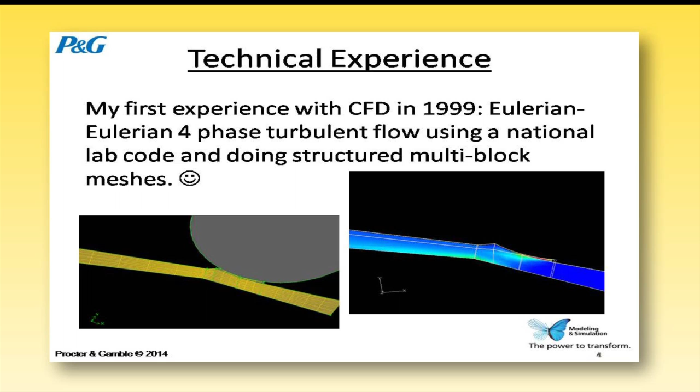But it also helped me understand, because it took me months to learn how to use this code. By the way, how many people in the room have built multi-block structured meshes? So you feel my pain.

For the rest of you who don't know what that is, be happy you never had to do that. But the point is this helped me really understand, because it took me months to be productive running these simulations. That's not okay today. We can't take months to teach somebody how to do simulations. They need to be able to do simulations in days or weeks at the absolute maximum. And so that's why this is my background. It helps me understand that.

So what's our technical purpose for simulation? It shouldn't be really different than what a lot of you guys are doing other places. It's about predicting and designing out failure modes. And those can be in products, packages, supply chains, manufacturing processes. That can be all the above.

Problem definition. I know a lot of you are in automotive, and so this idea of modeling forcing rigor is not a new thing for you guys. You've been doing this for a generation. Many other industries, this is not true. Many other industries, including mine, are highly empirical as our legacy, and so people do a lot of pretty black box experimentation.

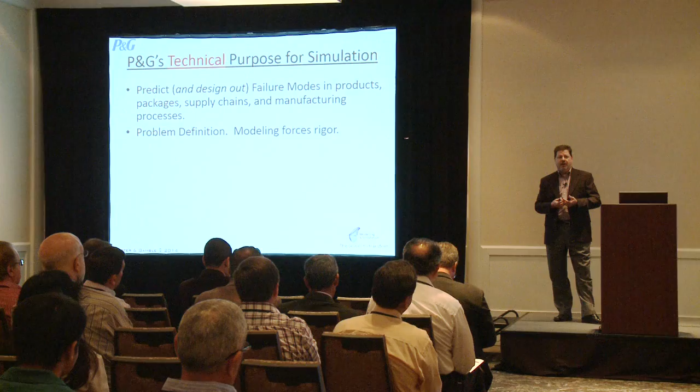So when people come to me and say, can you model something, I'll say sure, I can model that. But I have no idea if I can answer your question or not, because I don't know what your question is. Trying to build a simulation forces you to say, what's the question you're trying to answer? That's one of the things we're still in the midst of, and we're not unique at Procter Gamble in that. There are many industries still coming up that curve, in a very different place than automotive and aero are.

Understand the why of experimental results. We're still in a world where experimental and simulation are highly coupled. I heard it in Anand's presentation. In the electrical world, you guys are still there as well. There's a lot of things you don't completely have a handle on. So there needs to be a smart combination of simulation and experiments.

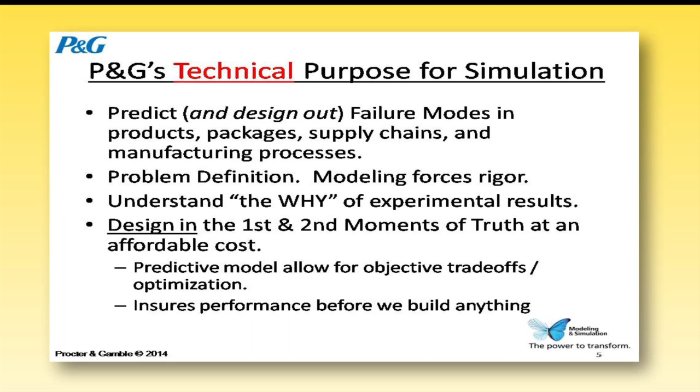And then we need to do what we call designing in the first and second moment of truth at affordable cost. For us, the first moment of truth is when the person walks to the store shelf and decides to buy the product. The second one is when they actually use it. So one of those things is it has to look good, it has to appear like something they want to purchase, and it has to work. It has to do both.

Because, and I know this is important in the automotive industry as well, how often do people buy a new car? Generally every 4 or 5 years. Our product, they repurchase it every month or two. So if you do not deliver on the second moment of truth, they don't buy your product again. And if they don't buy your product again, we're out of business. So what we call repurchase is extremely important.

And like everybody else, we want to ensure performance before we build stuff. We need to do these trade-offs to get affordable. So my point is, our industry is really no different than others. However, there's also this part about the business purpose.

We talked about innovation. Innovation is obviously extremely important because the requirements that consumers want, whether it's for cars or products for your hair or paper towels or whatever, is continually going up, and the competition is doing it. So we want to find non-obvious solutions.

We also can do a lot more trials than we can do physically, and I think everybody is aware of that. That's one of the great things about simulation. We can do cost innovation because everybody's cost conscious. Nobody wants to pay any more than they absolutely have to.

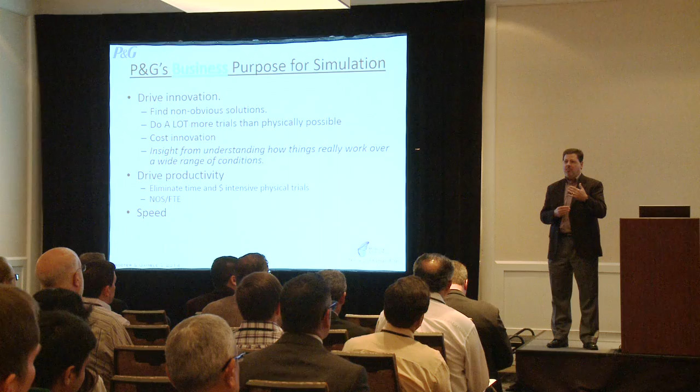Speed. How many people here think consumer products like ours get put on the shelf between October and the end of December each year? None of them do, because 30% of the product in the store is changed for the holiday season. So if you're in consumer products, you don't get to put a new product on a shelf in that time. You have to fit into the window that Walmart, Target, and Meijer want. And if you don't deliver in that time, you're not on the shelf. It's that simple. So being able to get to market when you're supposed to is critically important.

And we don't have 3 and 4 year product development cycles, we have 6-month product development cycles. So speed is critically important. First to market is extremely important. Faster decision making is extremely important, and simulation helps to do all these things. These are what the finance guys care about, quite honestly, and it's extremely important.

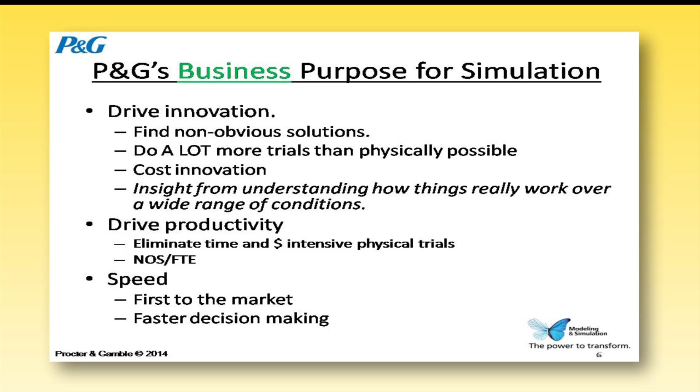I want to talk about a few failure modes. This is a failure mode that we'd rather not find out about when you do this in the parking lot, because you also would rather not have us find out when you do this in the parking lot, right? So this seems pretty simple, and actually this is a fairly old capability for us today.

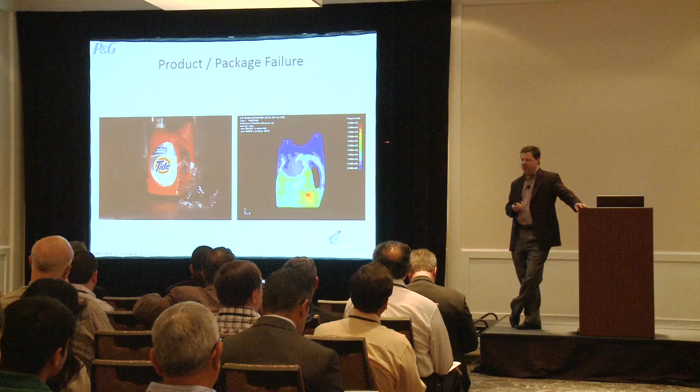But this is the design criteria for all packages that are larger than 2 liters. Whether that's our products, antifreeze, or whatever product you go to the grocery store and buy, if it's over 2 liters, this is the design criteria. There are 3 ways you can do this: you can either physically test it, you can do simulations, or you can just put a whole bunch of plastic in your bottles. But obviously that last one is not one you want to do if you don't have to, because it's quite expensive, and also from a sustainability standpoint, it's not really where you want to be. So predicting this before you ever make them is an important thing that we want to be able to do.

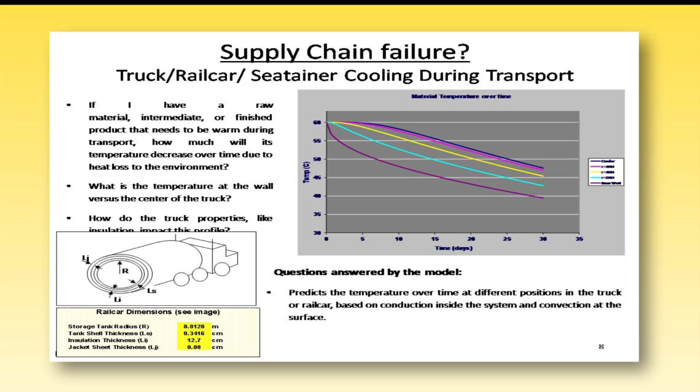We talk about supply chains. We handle a lot of raw materials. If those raw materials show up frozen, that's a problem, because melting out a truck can take about a week. And if you're planning for that raw material, and if you want a reasonable supply chain, you don't want to have huge amounts of inventory. It's pretty important, especially when you have winters like we had here in the upper Midwest this year, or if you're shipping a sea container across the ocean with a very rare raw material. This is an important thing to be able to understand.

By the way, this is also important for finished products in trucks, in cases. Some products are temperature sensitive, so you need to understand: are they going to get hot? Are they going to get cold? How long are they going to be exposed to those conditions? And when you have literally tens of thousands of trucks inbound and outbound on a monthly basis around the country, this is pretty important.

And also we have very different supply chains around the world. As you can imagine, the North America-based supply chain is pretty different than the one we have in Southeast Asia, which is pretty different than the one we have in Central and Eastern Europe, which is pretty different than the one we have in South America. And so being able to predict this, because we make the same products in all these regions, is a pretty important thing to be able to do.

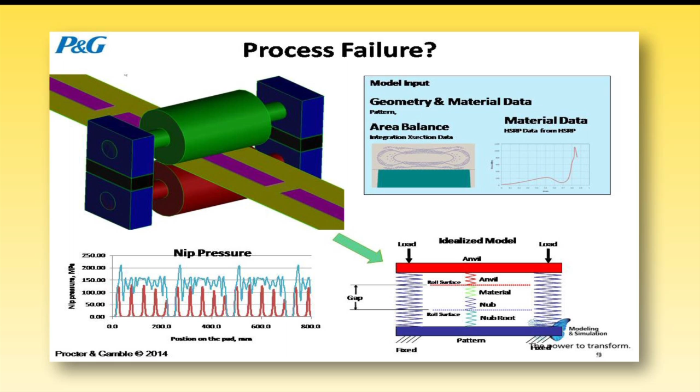And then process—this happens to be a mechanical process, but we could have had a fluid one as well. This is basically a high-speed manufacturing process for either diapers or our feminine care products. Essentially, you want to be able to put nice patterns on them, and you don't want to poke holes in them, and you want to be able to do it extremely fast. So this is an interesting dynamics problem, which looks pretty easy until you add a material in here, which I'm going to show you in a minute, that makes it pretty complicated.

And the reason I'm showing you these is to get to this point: these are not simple problems. Dropping a plastic bottle full of liquid and getting fracture criteria for plastic—that's a very, very complex problem.

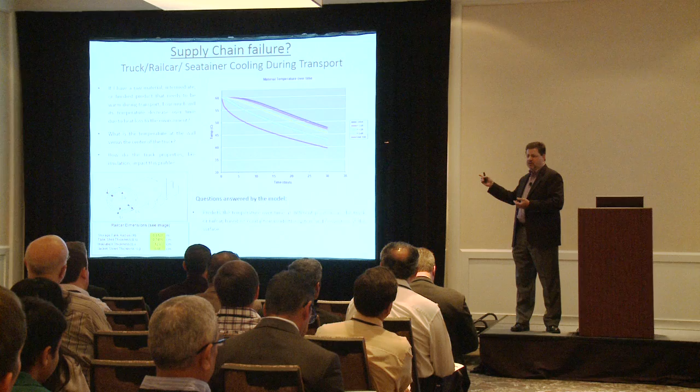Yet we don't want to have experts running it every time we want to test a bottle shape. We want to have non-experts doing that. If I go back to this one, these are questions we need to answer every day for different supply chains. We don't want to have experts do these all the time. We want to be able to have non-experts answer these questions.

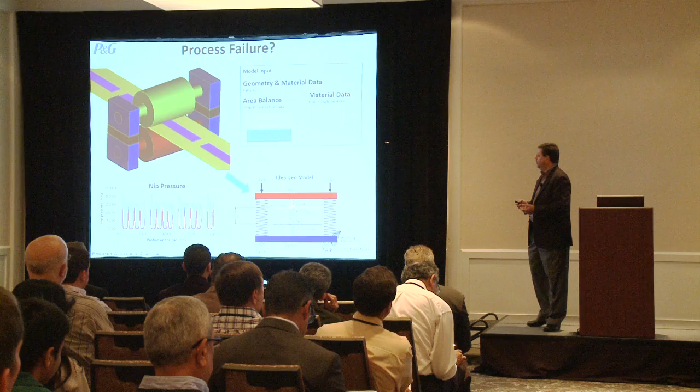Even this one is something, quite frankly, pretty routine in our product and process design world. We want non-experts to be able to do this, but the dynamics of this problem are extremely complicated. And so these are the things that we need to be able to do. Oh great, we have sound on this one.

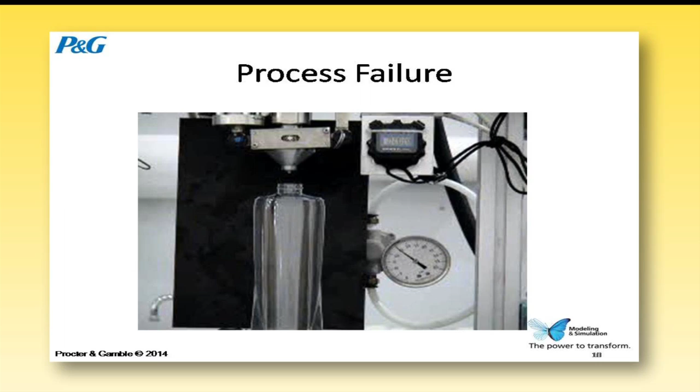This is pretty simple, right? Putting shampoo in a bottle, how hard can it be? Well, it depends on the fluid, right? And it depends on whether you actually want the product in the bottle or not. And because of the rheological complexity of this fluid, something as simple as putting a fluid like this in a bottle is actually quite complicated.

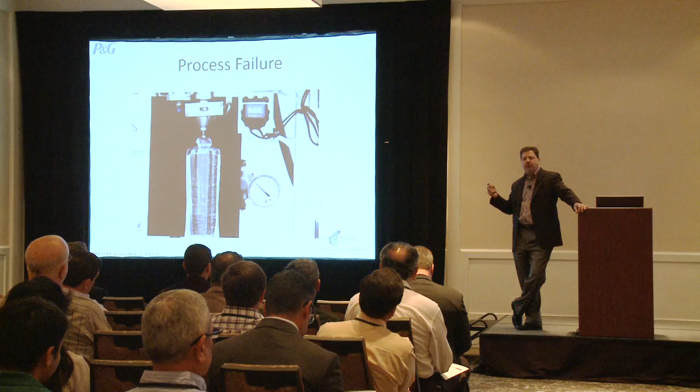And it's a very high-end tool. It's not a high-end tool because we don't know how to do fluid flow. It's a high-end tool because of the rheological properties of these materials, and the fact that they have hysteresis, rate-dependent effects, and all sorts of stuff in there. So that's what makes this a complicated problem.

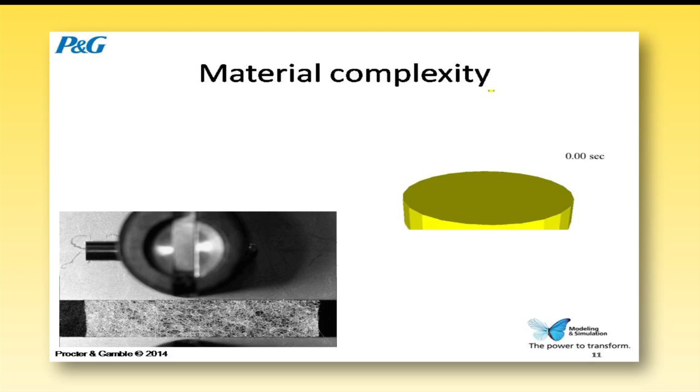And here's a couple of materials. The one on the left there, that's a non-woven. You typically find those in disposable diapers or things like this. This is actually a simulation of toothpaste.

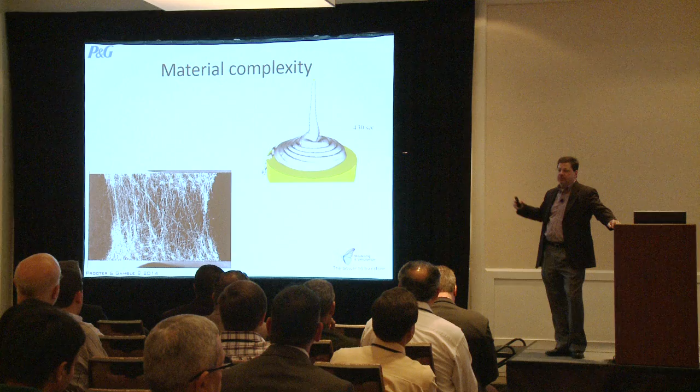And you say, well, who pours out toothpaste onto a flat thing? Well, nobody does, actually, or I hope not. But this is related to the properties of how you get it in a tube. And the same properties that lead to that coiling effect are the same things that either make it easy or difficult to get it into a tube at the rate you want, and actually have it in the tube, not all over the tube.

It also relates to how you get it out of the tube and put it on your toothbrush in the morning, so that it actually comes out and doesn't run out of the tube, or you don't have to squeeze it so hard you can't get it out. So these are some interesting material complexities.

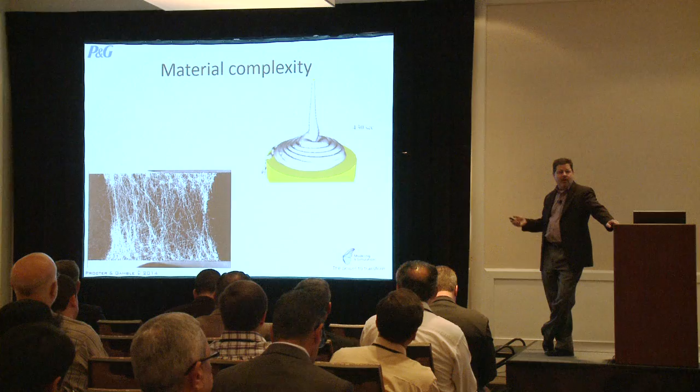Again, these drive very high-end tools. And yet these are routine questions that we want to have lots of people be able to answer on a regular basis. These are our engineering materials.

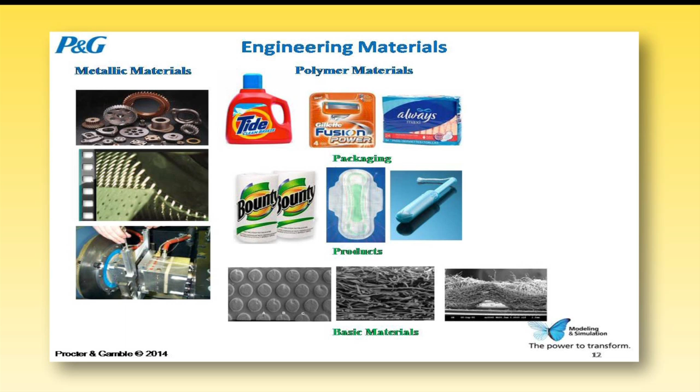We are really lucky when we get to work with metal. We used to have a joke in the one group that I led that said, can I please get to analyze a bracket? Because I actually know how to do that. The fact of the matter is most of the time we're working with polyethylene, which is a pretty highly variable product and actually has some fairly difficult properties associated with it.

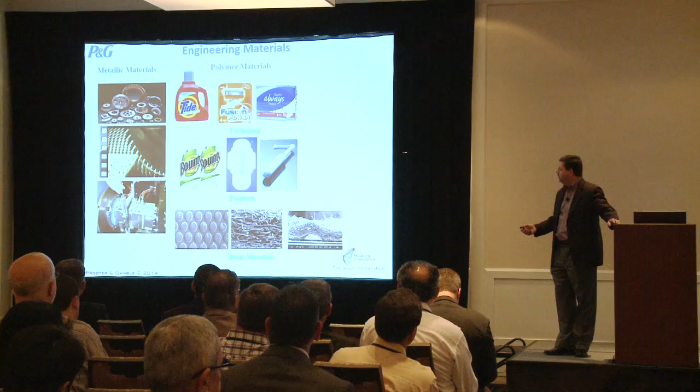Or we're working with elastomers, or we're working with fibrous materials like this. And so a lot of our starting materials are polymeric films or fibrous materials, and this can be both for their structural or for their fluid handling properties.

Structural properties of this, if you want to build a simulation, is one of the most difficult problems we've ever done. And you go to ask people how to go do that, and they're like, oh, well, just use soil mechanics models. Well, soil mechanics models don't work because soil doesn't compress 80-90% during its use and during its manufacture.

And so we actually had to develop not only test methods to actually measure those properties, but new numerical ways of describing the material behavior that's basically a combination of a lot of things that are out there, plus some very clever things that some smart people in our company figured out how to do. But this is one of the things that makes our problems very complicated.

And you have to, and just measuring this and getting it into a finite element formulation is pretty difficult. Getting it so it numerically solves is yet another problem. And then giving that to a non-expert so they can actually get an answer is yet a third. And yet that's something we need to be able to do if we're going to drive innovation.

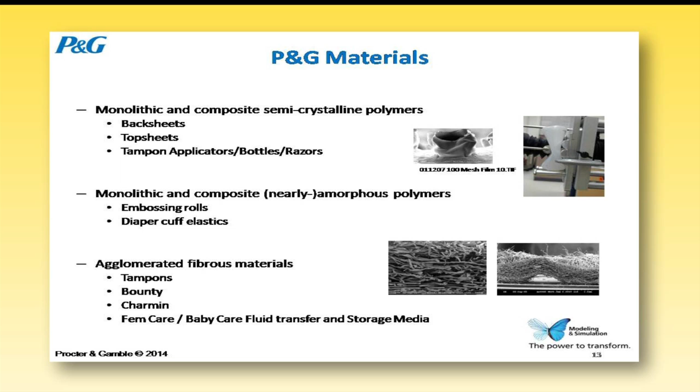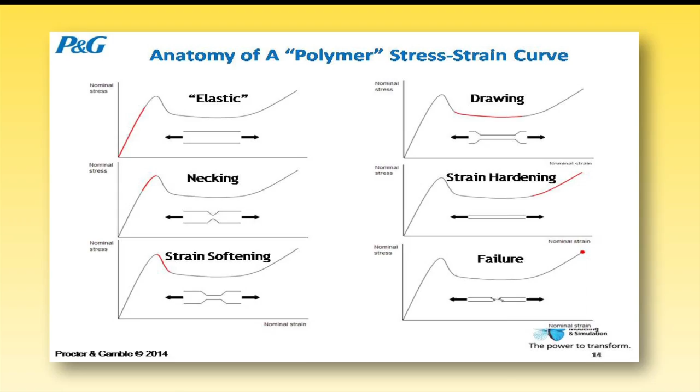This gives you an idea of a handful of things we deal with in terms of polymers. We do have polymers that are both softening and hardening in these regions, and we design them that way on purpose for specific things we want to do with the materials. But simulating those behaviors and getting them right is actually a very complex thing to do, and anyone who's done finite element work knows what I'm talking about. Polymers have this wonderful thing of having all these nasty behaviors together at the same time.

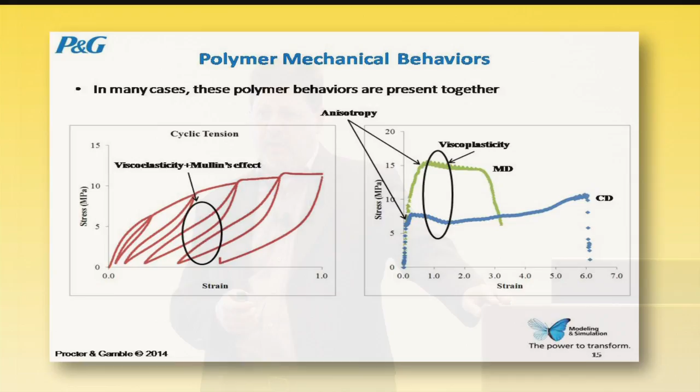And then when you add in post-consumer recycle, factor in the fact that I showed you plastic bottles. Most of you probably don't realize this, but most plastic bottles you buy today have three layers. There's the outer layer, typically virgin resin with colorant in it so it looks nice. There's an inner layer, also typically virgin resin, which is in contact with the product so you don't get contamination. Then whenever somebody says their bottles have post-consumer recycle in them, there's a third layer in the center, which can be up to 70% of the bottle, containing the post-consumer recycle.

The reason it's in there is because you don't know what's in it. So it's sealed from the product and sealed from the consumer in the middle. But it has highly variable properties, so you have to be able to handle it. There can be all sorts of stuff in there, because when they do recycling, it's never just polyethylene. You get a few labels, and some fillers that typically go into polyethylene as well, and how much of each one you have can actually be very different. So you get these very nasty behaviors, and they're not even always consistent day to day.

So you have to handle that idea of variability again. When I'm handling post-consumer recycle, the specification for material properties on it is about this big, because you get what you get. If you want to put post-consumer recycle on your package, you have to be able to deal with that. And if you want to predict failure, you have to have the ability to measure and predict failure modes based on a very wide range of properties. So this makes it not a simple high-end problem, but we want to do it every day with people who do other things.

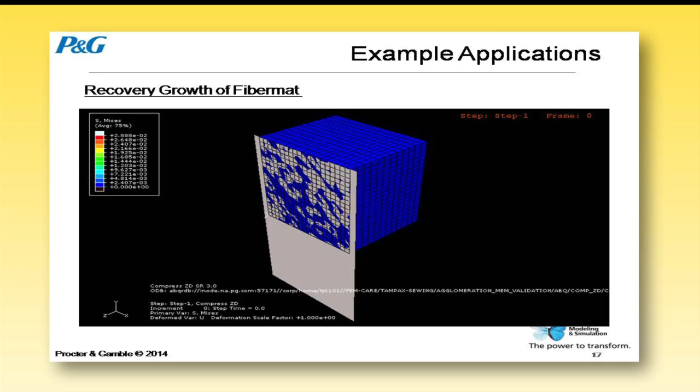This is an example of a pretty typical material in the fiber area, where you can compress it that much and want it to stay that way. If you can read the fine print, you can actually figure out what that's for - this is actually a process for making tampons for feminine protection. But you want to store that energy because in use you want the product to re-expand, so you can't have that strain be permanent. Locking that in, understanding it, and being able to predict it and use that for product design is a pretty interesting problem. I'll just leave it at that.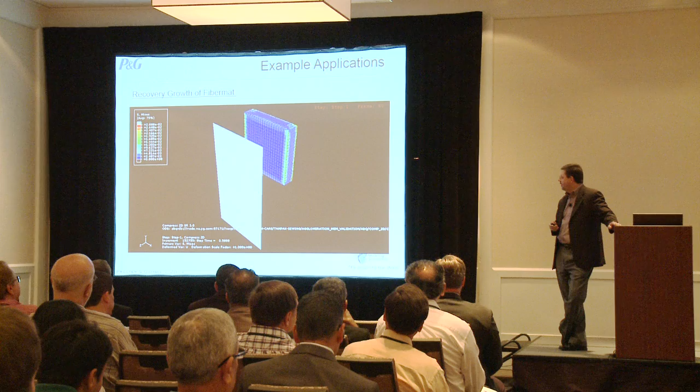Fluids also - you said, well, you have hard structures, guys, structural mechanics, okay I get that. Well, fluids ought to be easy, right? Well, it depends. This is actually a surfactant solution, and these are some velocity profiles that we've done with NMR imaging. This is kind of what you would hope to see, stuff flowing in a pipe. You can actually predict pressure drop because you have a continuous velocity profile.

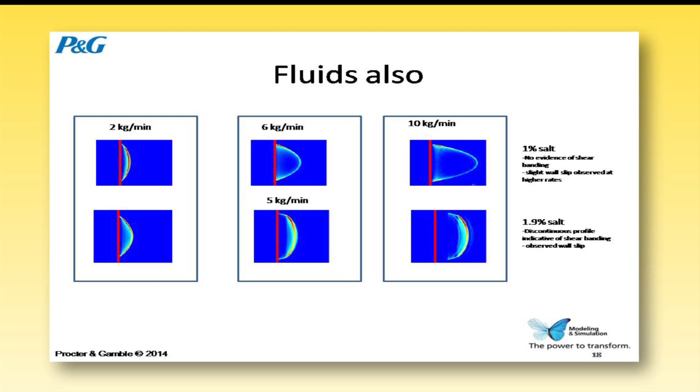Look at this. Once I put salt in there to modify the properties, now all of a sudden I have a shear-induced phase transformation. So I have a discontinuous material that I'm trying to predict the behavior of with continuous equations. That's a problem. With this material, I can't even get pressure drop in a pipe right.

We cannot even predict that until we had the ability to measure this, and now that we've developed the ability to simulate this. I'll move on, but my point is for what people think are relatively mundane products, and for what seem like pretty simple problems to answer, material behavior can make those very, very complex.

The bottom line is we do have very high-end problems. We need powerful solvers, sophisticated boundary conditions, settings, solution methods. A lot of these are highly nonlinear problems, so the solution strategy for even solving them is not just fire up the solver and let it run. You oftentimes have to sneak up on the solution in the solution methodology. It requires a fundamental understanding of the underlying science.

I'm going to talk about this more, but this is why putting simulation tools into the hands of simulation non-experts is critically important. Because that last problem I showed you with shear banding, or shear-induced transformation, you need somebody who understands physical chemistry and rheology to help with that problem. You're not typically going to find somebody who understands physical chemistry, understands rheology, and is a simulation expert all in the same person. If you do, you want to hire them, because there's five of them in the world.

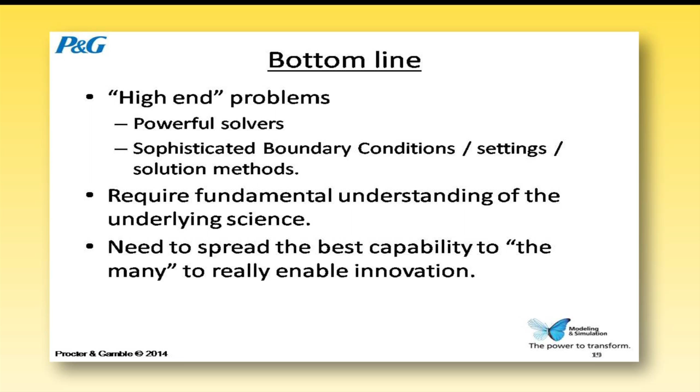But you want to enable other people who might be formulation experts or engineers to use those tools. That's why that thing is so important. You need to spread the best capability to the many to enable innovation. So, different physics, few experts.

What this leads to in many industries, and I think consumer products has got this, others do as well, I'm sure you guys do, is the breadth of science means that many of your engineers are jacks of all trades. They know a little bit about a lot of things. If you look at my own experience, I've done manufacturing engineering, mechanical simulations, fluid simulations, discrete event work. I built stuff in manufacturing plants. That's part of the base of people that we have.

That can be a disadvantage, or it can be an advantage. One of the advantages of seeing lots of things is you make non-obvious connections. You're like, hey, I saw that there and that there and that over there. What if I could put those things together? And you can drive innovation.

So we actually don't see this as a problem. It's a problem for me wanting to give simulation tools to people, but from a company standpoint, this is an advantage, because it leads to products like this. Some of you have probably seen this. This is a product made in a manufacturing line that looks much like a diaper converter. So the manufacturing process looks more like making diapers than making detergent, but we put detergent inside of it. It's a coupling of detergent making technology and diaper making technology, and not very many companies have people who do both.

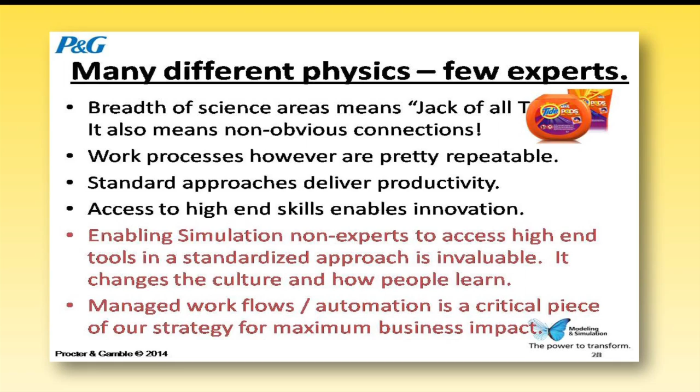Managed workflows and automation is also critical, because if you want to do it over, you want to get the data from a PLM, you want to put the data back into a PLM, you have to have this. And if you want to go fast and you want to know what you did and be traceable—this particular product isn't FDA approved, but we have a lot of FDA approved products—what this means is you have to have all your data, trace it, know where it is, and be able to produce it if the FDA wants to see it.

So all of this needs to happen, and this is a pretty complicated problem. So here's an example of just a routine thing that we do on a regular basis. I want you to ask yourself, do you want a simulation expert doing this particular thing?

Here's something pretty simple: pouring liquid out of a bottle. Got to be pretty simple, right? Everybody does it the same, right? No, nobody does it the same. Everybody does it different. So this is just a handful of people and there's a huge difference in how they do it.

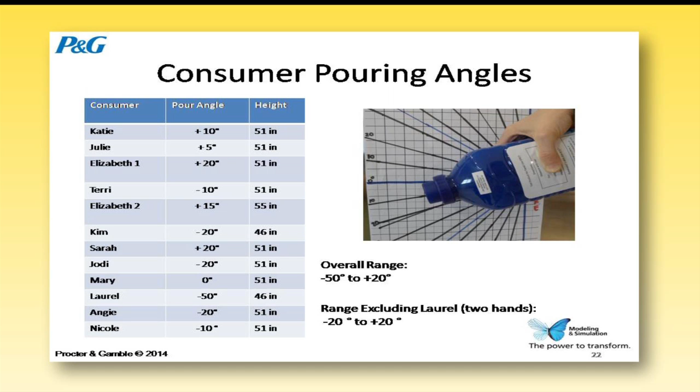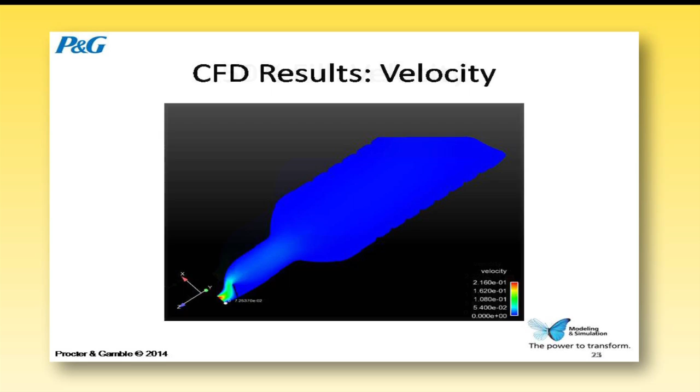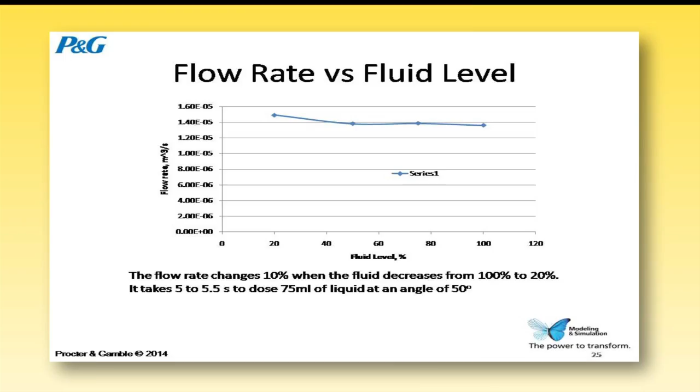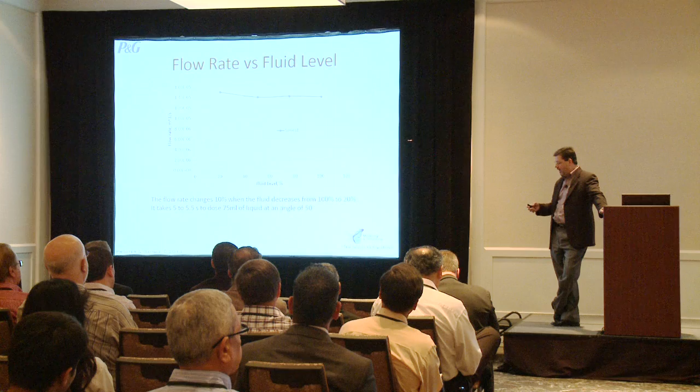Ideally, I want to make this as independent of angle as I possibly can. Ideally, I'd like to make it robust over a range of physical properties because I want to use the same package for multiple products. And yet, I don't want simulation experts doing this all day long, because honestly they're going to get kind of bored building this, and it's not a great use of their time. But if the guy who's designing the package can do this routinely, that's a really big thing. Or even the people doing consumer studies can do this on a routine basis. This is a powerful thing.

So I talked about this a little bit, but I think this is a business reality in many companies, especially smaller companies. Modeling and simulation is viewed as highly valuable, but it's still seen as a tactic rather than a way to do technical work. You guys talked about how it started out being a way to make sure you got your design right. A lot of places it's still there. It's still not fully integrated into the work process as much as we would like.

We have a lot of companies, ours included, that have historically been very empirical because of this complexity I'm talking about. People say, well, this is too complicated to simulate. In some cases they're right, in many cases they're not. Many organizations have a fairly small number of experts. The big value comes when your experts can integrate the work and it changes the work process — it becomes the preferred method. Automotive, quite frankly, has made that transition in most places. A lot of other industries have not, or are in the midst of it.

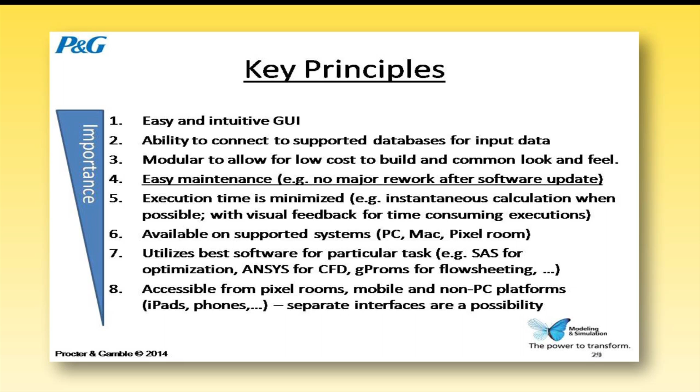And accessible from a lot of different places, because I really do believe that if I can give simulation tools to my plant engineers - I was one of them a long time ago, walking around on the floor with a tablet - I can change their world. And I can change the productivity of the manufacturing environment. That's something we can't do today. That's something that we need to do five years from now.

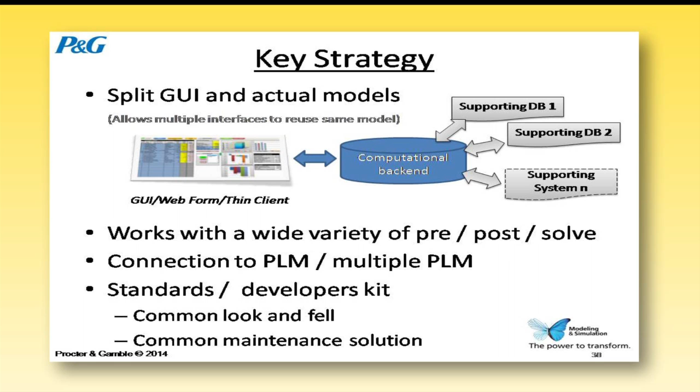And so this is a lot of little architecture stuff, I talked about most of this. This one is something you guys in automotive do a lot of. A lot of people outside of automotive and aero are just starting to do PLM. And so any way that you do all of this stuff needs to go get data from and put data back into what I call a structured database, or what we call PLM.

I also think we need to have, whether you want to call it a developer's kit or something else, you can call it what you want. But we need a common look and feel, because if I'm going to enable somebody to use a dozen different tools as part of a work process and they all look different and work different, that's not good.

The software industry figured this out a long time ago. Apple started it with the original Mac. But if you think about the Microsoft Office suite, or any other suite of software, there's a premium on look and feel. Why is that? It's about productivity, people know where to go look. And if every one of these things is designed differently, that's not good.

And it's also from a common maintenance standpoint. You're going to hear me say maintenance probably more than any other word in this presentation, because when you go to putting these tools together, it's relatively straightforward to create a tool. It's very difficult to manage the life cycle of that tool on an ongoing basis, because typically it's created by the expert. The expert moved on, is doing something else now. Their interest in maintaining a tool is about this big. That's not what they do.

I just put a thing in here very quickly just to show you this is not just about P&G. There's actually a state of Ohio consortia called AWESIM that's about how do I provide these kinds of tools for small and medium-sized manufacturers. I'm not going to go into any details other than just to say this concept is out there for others, and if you want to go read it yourself, you can do that.

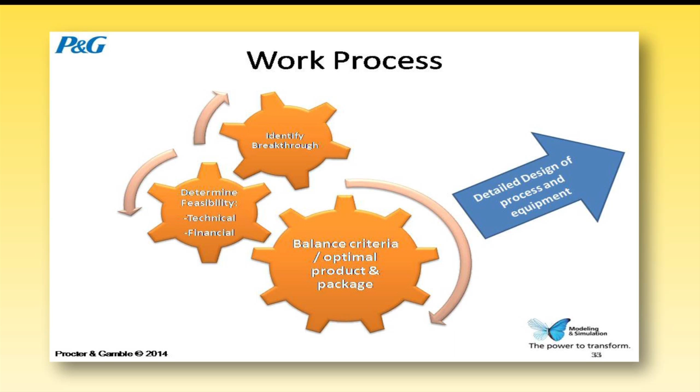Just a couple of things around where this all fits. In general, our work process, and I think most people's work processes fit this, you identify some kind of innovation breakthrough, you do feasibility testing, you do a bunch of optimization to try to balance all the criteria. You want to do all this stuff with simulation before you start on detailed design. And here is where enabling people that are experts, again, in physical chemistry, are important.

I'm going to go through this very quickly. Basically, if you have somebody who's an expert in mixing technology, processing of fluids, but not a simulation expert, this is a tool that we've created. You can go through and do a bunch of stuff here, and then they can get this themselves. These are animations that they can go visualize. That's what they get.

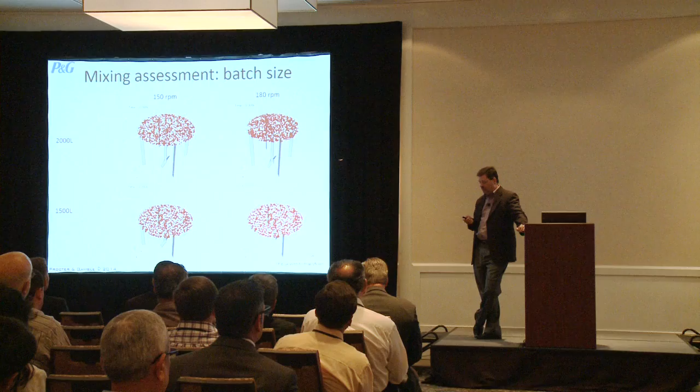And this is all done. We teach people to do this in about a day, and then they can go off and do this work themselves. For those of you who've been involved in setting up a mixing simulation and getting it to run and getting useful information out of it, if you're an expert, even with today's tool, it can take you about a week. We can set problems up in about 45 minutes now, and people have answers tomorrow morning when they come into work. That's what we want to do for all of our processes.

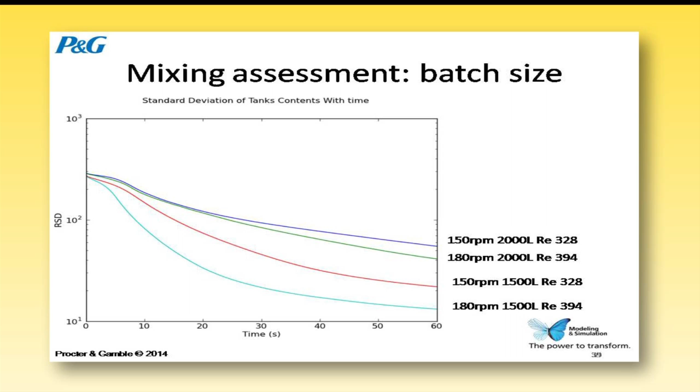And so there's the pretty pictures. And then they also get this plot. This is basically relative standard deviation.

And so they can see here's how all these things work, and here's the Reynolds numbers and a bunch of stuff. But anyway, this is just looking at different options.

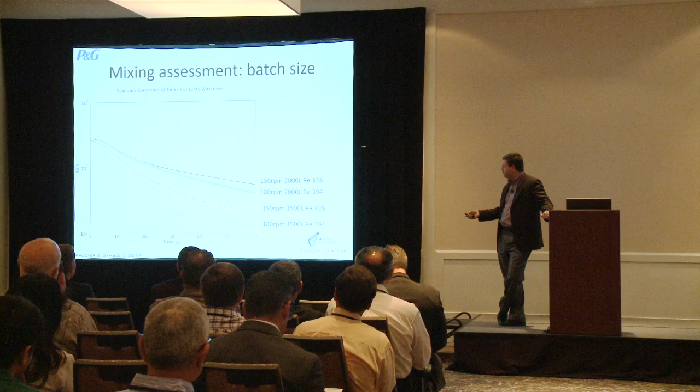Now, since I said Ansys, I figure I probably ought to put something from Ansys in here since I'm talking at an Ansys conference. I'll go quickly. I was really happy to see that you guys got SpaceClaim because we were using it before. It's one of my favorite tools now when I occasionally get to do simulations. But the point of this is that this is now easy.

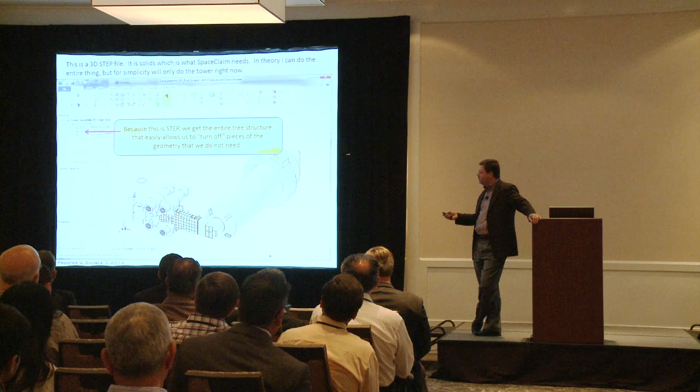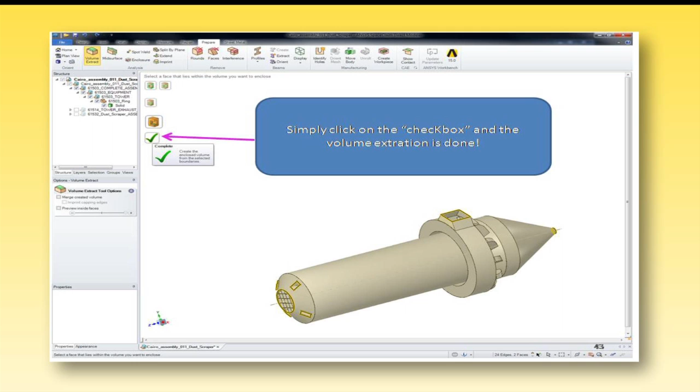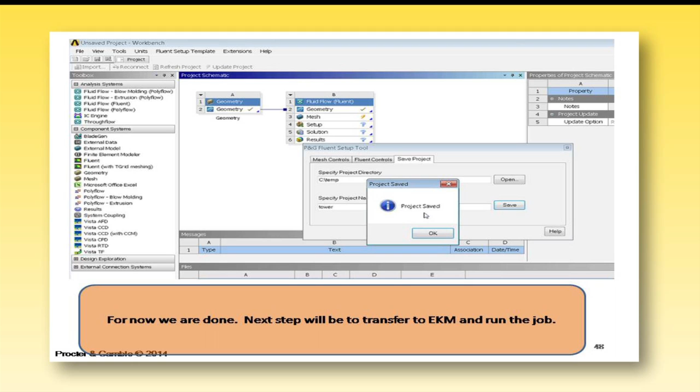You can go over here and turn things on and off. You can seal this up, this is geometry extraction, guys, this is fabulous. For people who did it the old-fashioned way, this is awesome. All you got to do is cap it off, hit volume extract, and magic happens. I can't say enough about this tool. I love it. And now you're ready to set up and mesh, and this is something you guys created for us. You get all this stuff, and now you have a simulation.

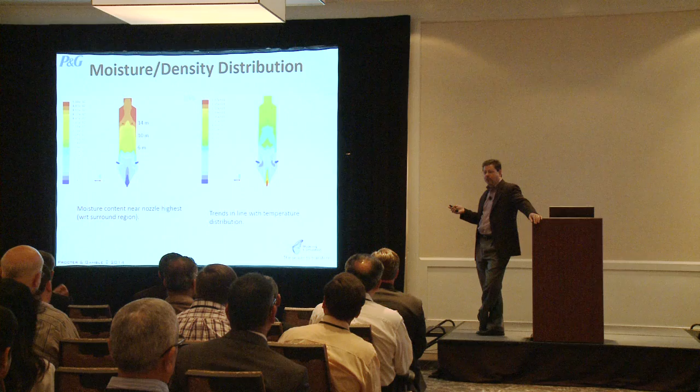This is great capability. However, here's one issue I have. All of this is custom scripts. Is there a toolbox we can go create this with? Sort of, but not really. It's still all custom scripting. So each one of these is a one-of-a-kind. From a maintenance standpoint, documentation of how it works, when we go to a new version, how does it get upgraded? That's still a pretty clunky task to do. It's a wonderful tool for the user. It's not so great a tool for the guy who has to maintain it.

I'm not going to go through this one, but this is an example out of Plant Sim where you can compile executables. This is a pretty clever one actually, because people can only use and change a handful of things in it. So where next?

We, and I believe the industry, are going to more structured work processes. We have to, from the standpoint of productivity. Modeling as the how for many decisions. We're going to continue to populate that.

Simulation tools embedded in a PLM or connected to it. Get data from it, put data back into it, and do that in a seamless way without the users having to spend all their time in the PLM environment. Enablement of the masses - and what I mean by that is people who are experts in their science, but not experts in simulation.

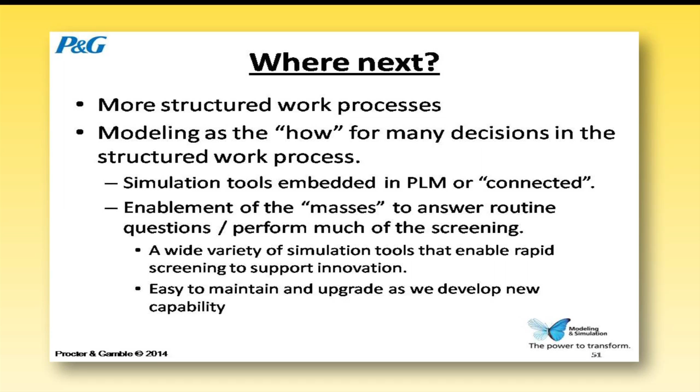A wide variety of tools, depending on the work process. Easy to maintain and upgrade. I know I've said that a bunch of times, but hopefully I got the point across.

So what do we need for that to be successful? I think we need a standard developer's kit, just like you have for these things. The apps that are on here all work the same way, more or less. They all have a common look and feel, and they're written to the same standard, so maintenance is relatively straightforward.

We know we're going to have a split interface and solve. I'd like to get to a single language if we could. And we need light bandwidth requirements, because if I'm going to enable the engineer on the factory floor with a tablet, he can't be doing hardcore calculations on his tablet. They need to be remote, but he needs to get them right away, wherever he is. I think that's a pretty important thing for us to be able to deliver.

I'd like to see common approaches across industry. I'd like to see us allow a wide variety of pre and post tools, a wide variety of solvers, but all in a standard interface. Because in my world, at least, I am not going to get all of it, unless Ansys buys up everything, which I don't think you're probably going to. I'm going to use tools from a variety of different suppliers for different industries and to answer different questions. If my solution to give all this stuff to people is different for every one of those areas of science, it's going to be extremely difficult for me to lead the culture change I want to lead.